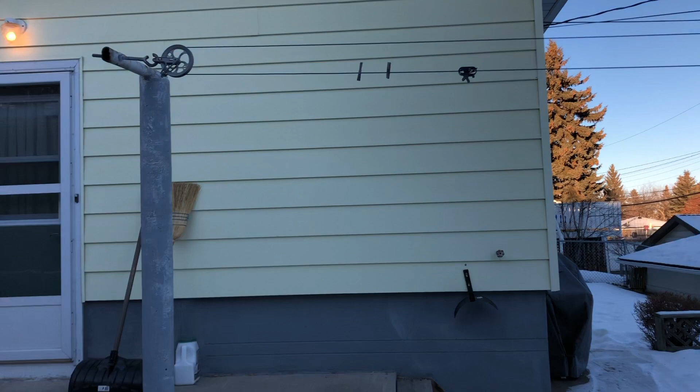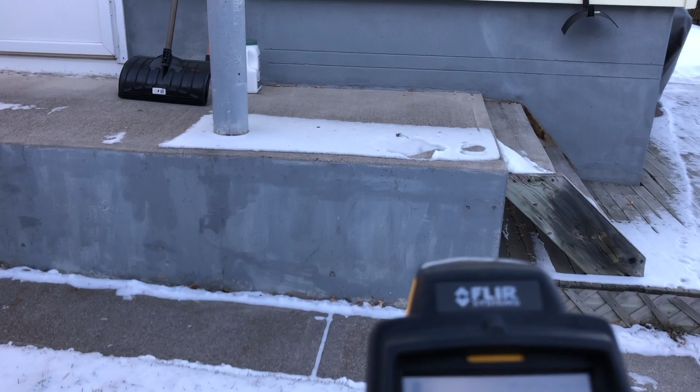Very typical 60s construction bungalow. And I'm going to show you something very shocking about heat loss in uninsulated basements. So it's about minus 10 degrees outside, and if you look at the foundation here, it's running at a whopping 4 degrees, and it's, like I say, minus 10 degrees outside.

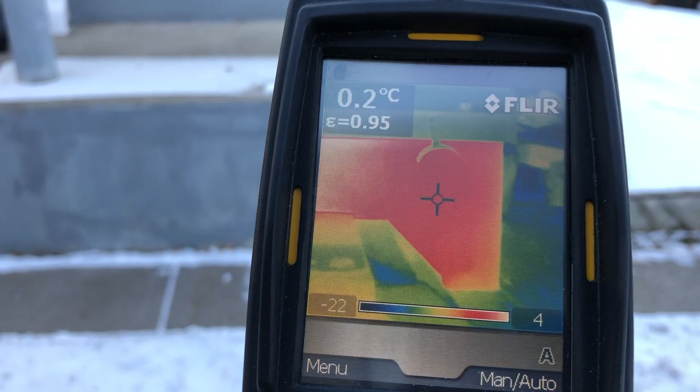Huge heat loss here. If you go a little bit to the corner of the building, it's not as hot, so there's air circulation or something going on around here that's giving you so much heat loss through there. Now, comparing it to another very typical 60s bungalow, but this foundation, I know what it's got.

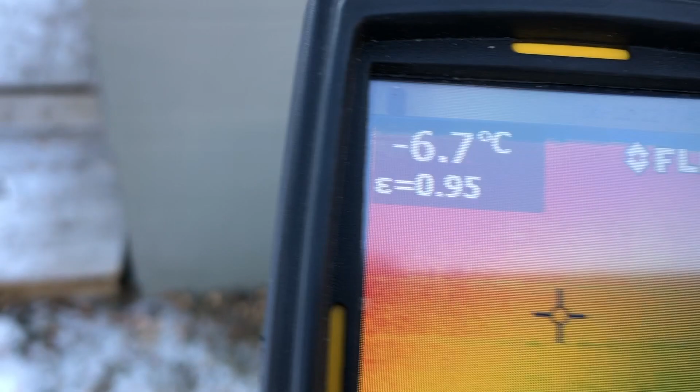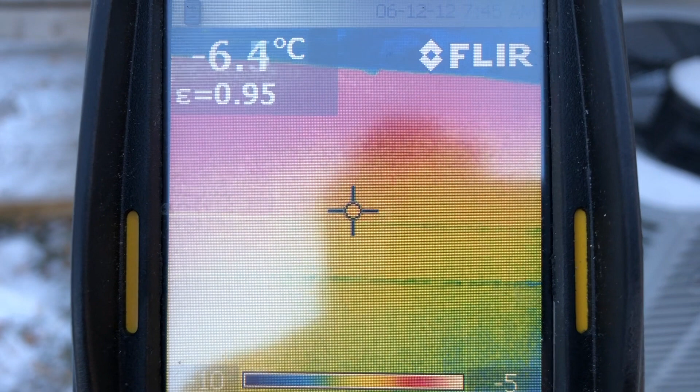It's got 2x4s with rock wool, and that's minus 6 degrees. So it's a lot better, and that's only 2x4. So you can see how important it is to have insulation in your basement.

Most of those 60s bungalows, unless they've been redone substantially, have all kinds of stuff down there. A lot of them have 2x4 walls, but then they also have a lot of exposed concrete, and then they have kind of dodgy insulation in them. So for modeling purposes, I modeled the basements at an R8.

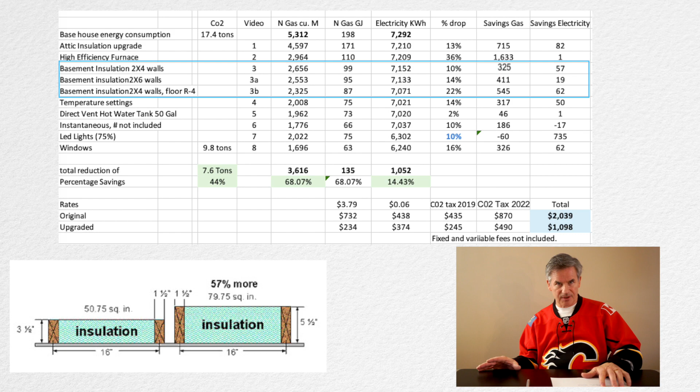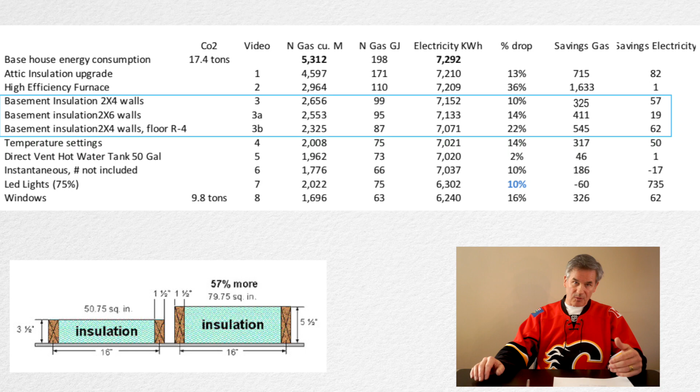Now, going from the R8 to three scenarios I looked at: a 2x4 wall with an R12, a 2x6 wall with an R19, and then a 2x4 wall with a subfloor, about an R4 subfloor. What you really want is to make that thermal break. And so the 2x4 wall with a subfloor performed well, not the best, but the most economically.

And so on the floor, you want to use a subfloor. The one I have here, the one I use in my house, is a DRIcore. Works really nice. You have a little bit of insulation, and then you have the OSB. And so it gives you a thermal break and some insulation. That gives you about an R4. And the big thing is it makes that basement so much more comfortable. So there's energy savings and comfort.

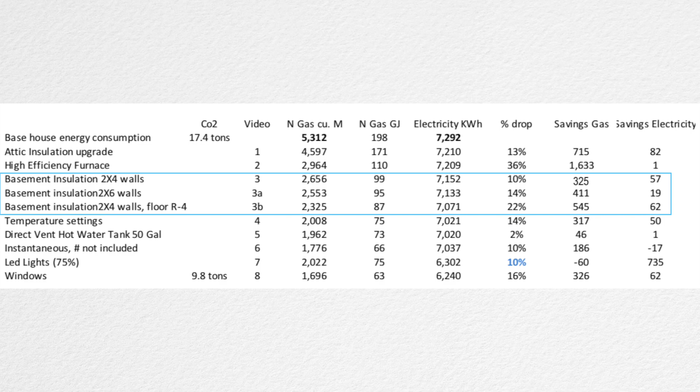With that, what did we save? We saved 325 cubic meters of gas per year with the 2x4 wall, upgrading it from an R8 to an R12 plus the subfloor. Not that much of a change, but a big difference in your energy consumption and comfort of your basement. So not that hard to do.

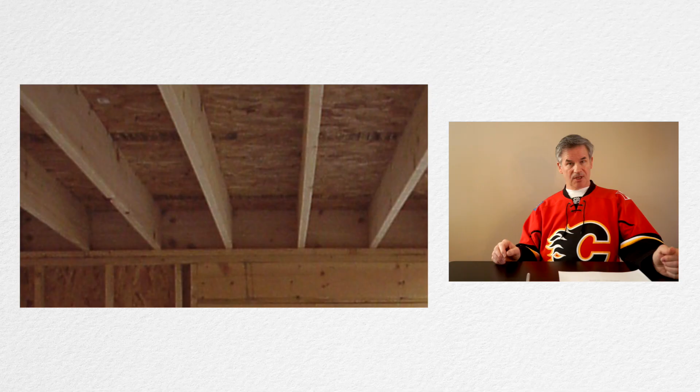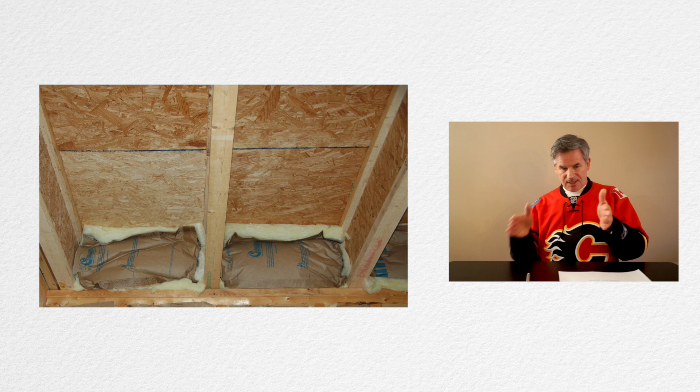The other thing you want to really watch is your rim boards. You know how you go to the side of your house, like by a window or by the wall, and the floor's cold around there? That's because the rim boards are not insulated well. That is the area where you have your floor joists and then the rim board on the exterior. Make sure that area in there is insulated nicely. Otherwise you're going to have cold feet by the walls. So there's more comfort in getting your basement insulated nicely.